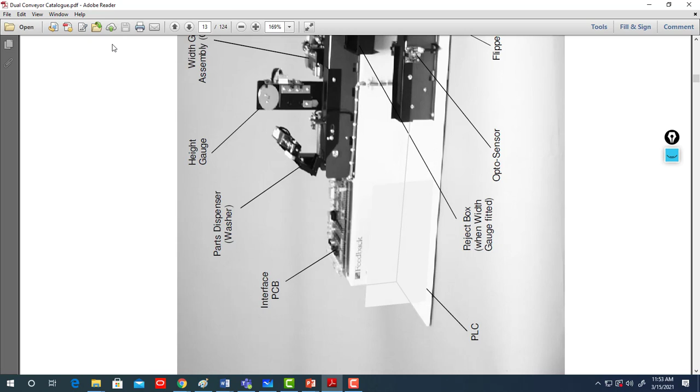I will go with you over the inputs and outputs names. So in here, let's say, I may rotate it.

So here in this photo you see the Workcell system. Here is the Workcell system.

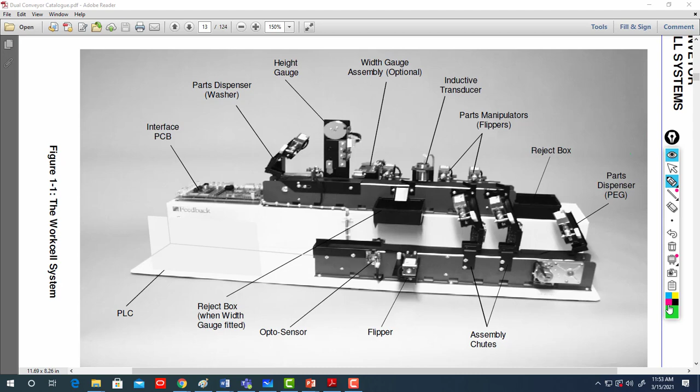In which you can see, starting here, this is the interface PCB.

Here you should have your PLC, like it's sitting here. Then starting from here, it's called the parts dispenser. So the parts dispenser is here, so you have the washer.

Here you have the height gauge. This is a height gauge, so it measures the height of your washer.

Here you're supposed to have a width gauge, and this is optional, so we didn't buy it. So we don't have the width gauge, and we cannot measure the width of your washer. We can only measure the height. So we only have this; we don't have this. This we don't have in our conveyor belt.

You have here an inductive transducer, so it detects metal. And here you have flippers.

Parts manipulators or flippers. So maybe plastic, you program it to go this way, and metals to go this way, or reversely. And here the parts—it's a reject box.

All the parts that are not the good height, too small or too big, then you throw them here.

Here you have a parts dispenser also, like this one. It's to dispense parts. Here it dispenses a washer; here it dispenses the peg.

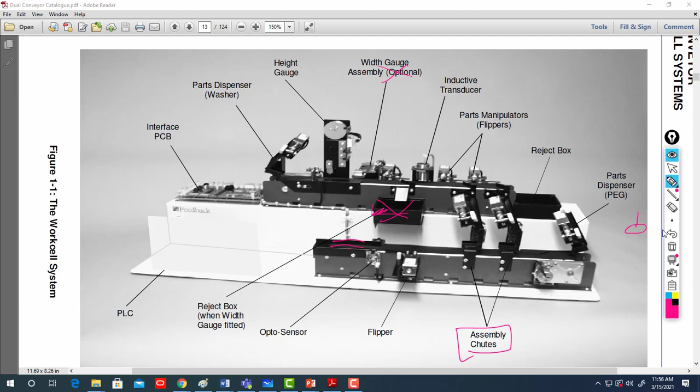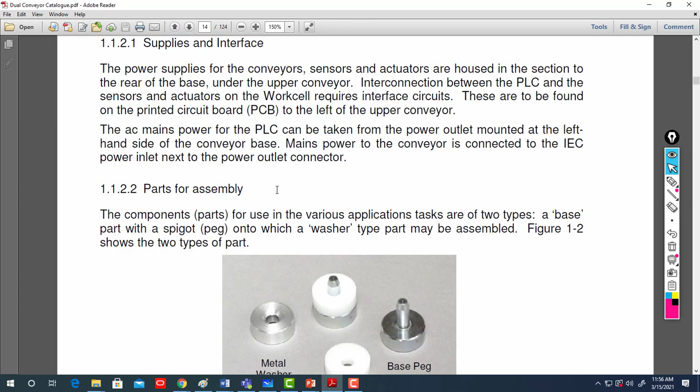So those are the parts for assembly: metal washer, this is the base peg, plastic washer, and how the peg and the washer will fit.

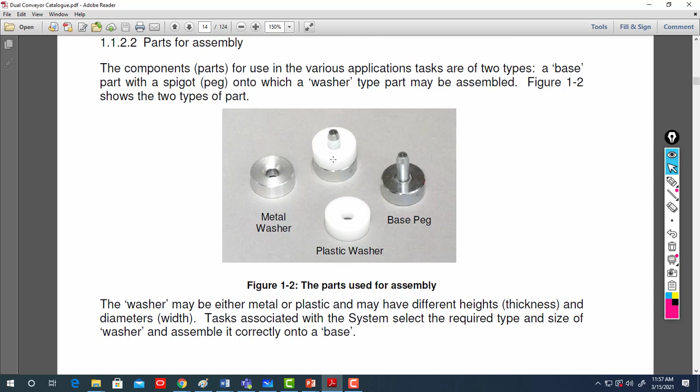So here are the available heights you have. Talking about height or thickness, the standard or correct one is 8.

Wrong height is 7 millimeter and 9 millimeter, so it's 1 millimeter difference. 8 millimeter is a good height; 7 or 9 are a bad height.

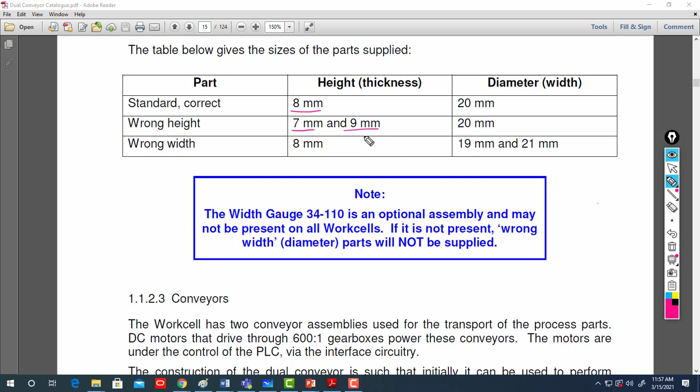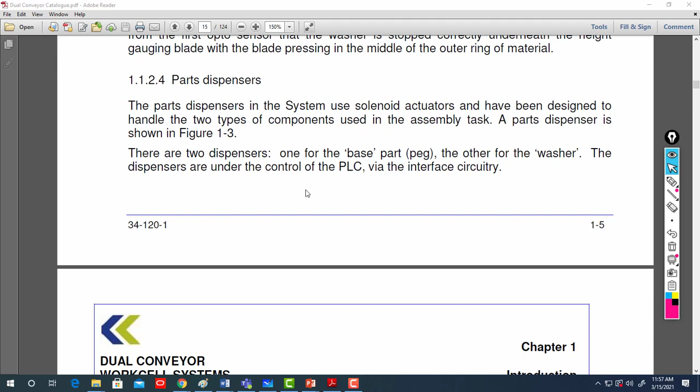The parts dispensers—we have one for the peg and the other one for the washer. And here is how it looks like.

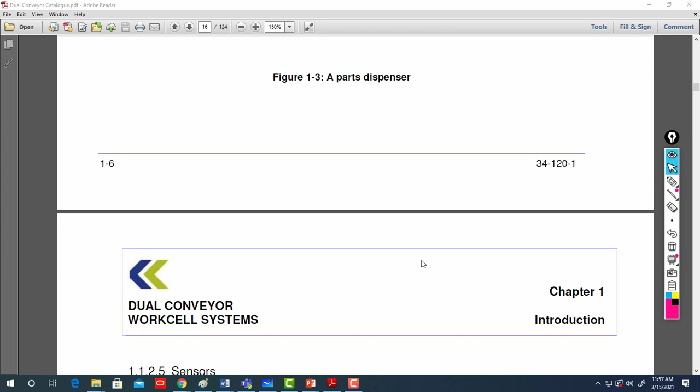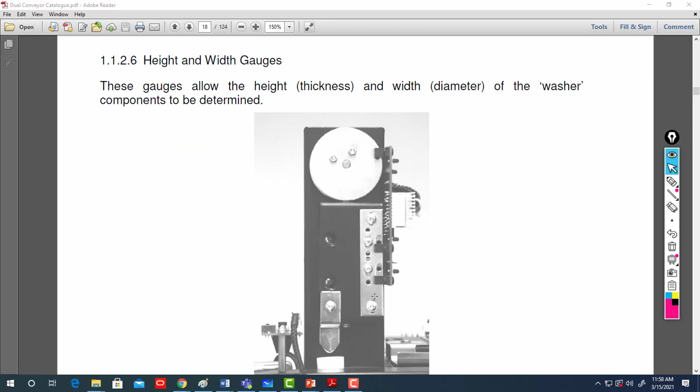So here it's the part dispenser for the washer. So you have here an opto detector sensor, also an inductive sensor, and the height detector.

This is the height detector. Width detector—we don't have it.

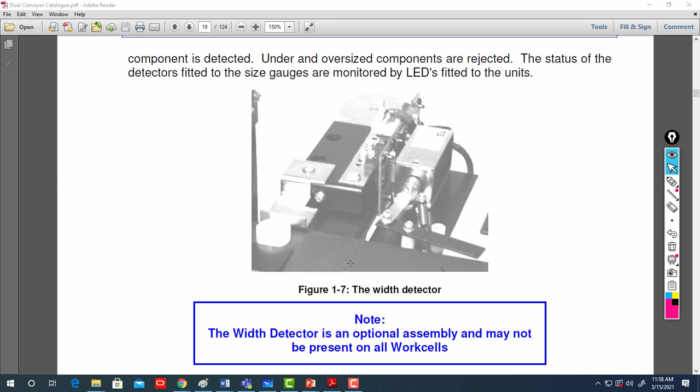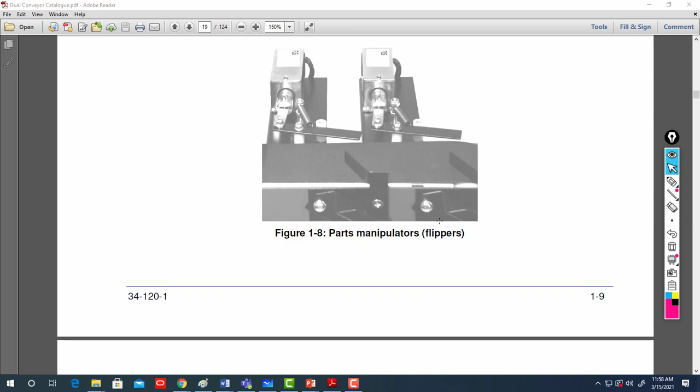Parts manipulator: so you see, maybe you put metal here and plastic here, etc. Those are the parts manipulators, or flippers—we call them flippers.

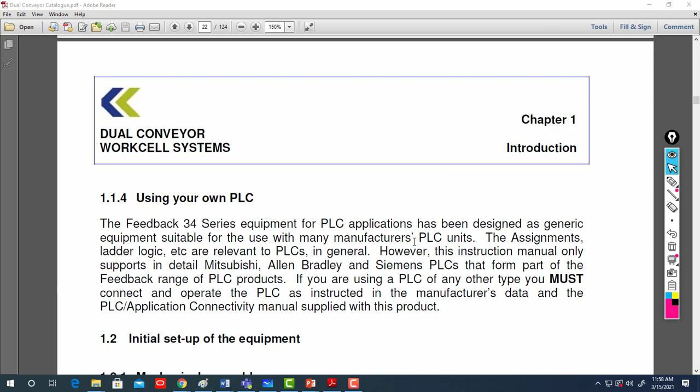So talking about the top conveyor, here is talking to you about your inputs and outputs. So how many inputs and outputs do you have? That was the main question in our case—how many input and output do you have? So let's see.

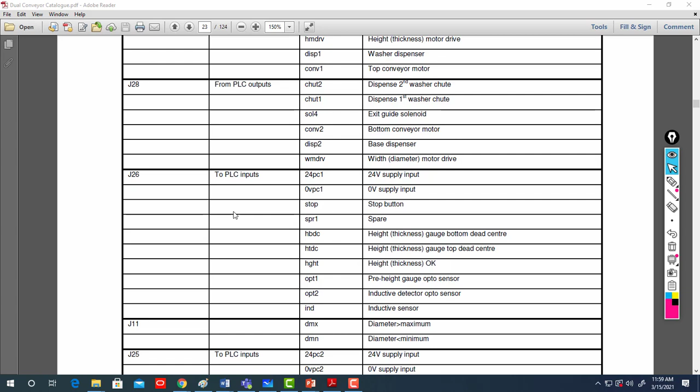Here, if you wish, I will start with the PLC input. So that means talking about output as well.

So if this is the PLC, and here is the input and here the output, so something goes to the PLC input. Actually they go to the PLC input.

What is going to the PLC input? So basically they're actually the sensors, right? So here they said they have a stop button.

Okay, so here you have the pin description, and here is the pin name. Here you have pin name, here the pin description.

So you have a pin, the name is stop, and it contains stop button. Okay, so then this is one input you have.

You have a height, thickness gauge button, dead center. Height, gauge, bottom, dead center.

If you wish, height bottom, dead center. HBDC - height, bottom, dead center.

So this is for the height, for the thickness. You have bottom dead center, and you have

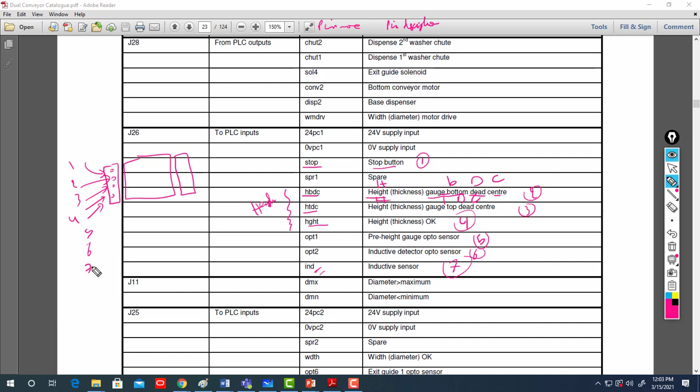So now I'll take them. Okay, 6, 7. So let me delete them and I move. So I have 7 up to the inductive sensor.

If you wish, okay, 1, 2, 3, 4 - all of those are for the height. 5, 6, 7, and you have - we don't have widths. Okay, we have exit guide 1 opto sensor.

This they call it opto 6. Okay, in this catalog they call it opto 6. 1, 2, they call it opto 6. Opto 5. So where is opto 3 and 4?

We'll look at them. Okay, opto 6 is exit guide 1 opto sensor and exit guide 2 opto sensor. The 2 opto sensors are at the end of your second conveyor belt, so to count the number of metallic and plastic parts. So those are them.

But also before them you have 2 other opto sensors, so 10 and 11. So you need to make sure that your number of inputs, the input module, PLC input module, can have all those inputs.

Otherwise you cannot work on it. You cannot connect all your inputs in that case. So opto 3 and opto 4 are the chute opto sensor, first chute and second chute opto sensor.

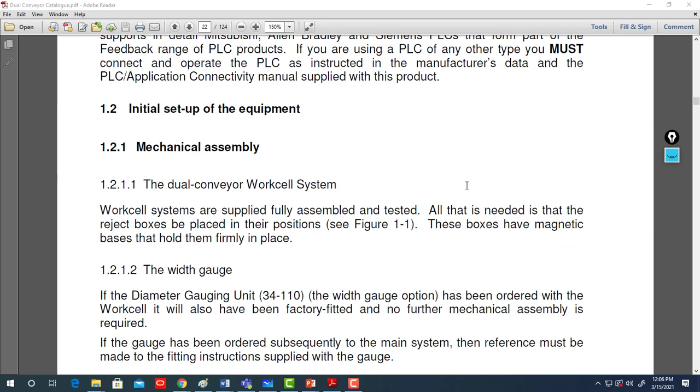Okay, yeah, what's this first and second chute opto sensor? Let's go to the... Okay, so I'm on page 23.

You want to go to page... here, 13.

So where are the chute 1 and the chute 2? First chute opto sensor and second chute opto sensor.

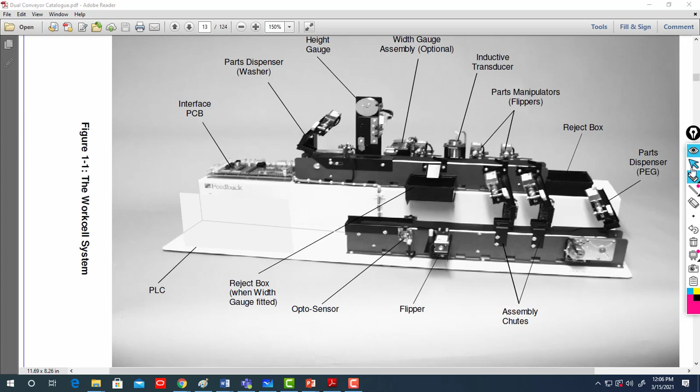So let's now recite our inputs. So you have start and stop push button are here.

If you wish, I will name them as A. So I start by this - stop 1, and so you have 3 on the height gauge.

You have bottom dead center, bottom dead center, top dead center, and OK. Say OK. So you have - these are 4 inputs to the PLC.

Pre-height gauge opto sensor. You have here pre-height gauge opto sensor, and so this is 5. 6, inductive opto sensor. 7 is the inductive sensor.

8, exit guide 1 and 2. So here 8 and 9. Okay, 10, 11, and 12.

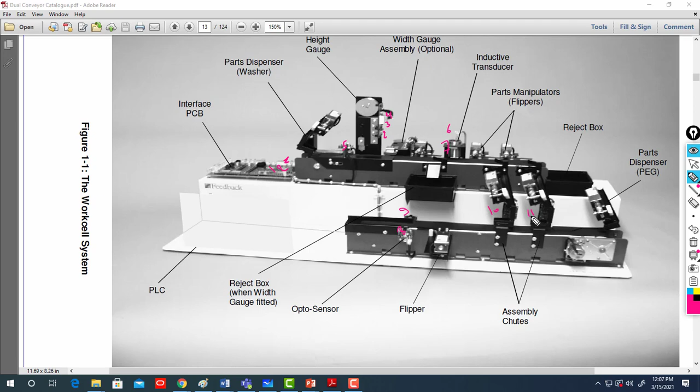So 12 is this. Then 10 and 11 are these two. 10 and 11 - see, this is what we call first and second chute opto sensor.

So this is the assembly chute. When your flippers go this way, then they move this way. Here, this is the opto sensor chute 1 and chute 2, chute 10 and 11.

Okay, so then those are the 12 inputs you have. So you have 12 inputs in your system. Maybe it's hard to know this exactly. So now, when we program it, we'll understand how it works, and whether we use all the pins, or we only use 1, or we use 3, etc.

So what about the outputs? How many outputs do I have?

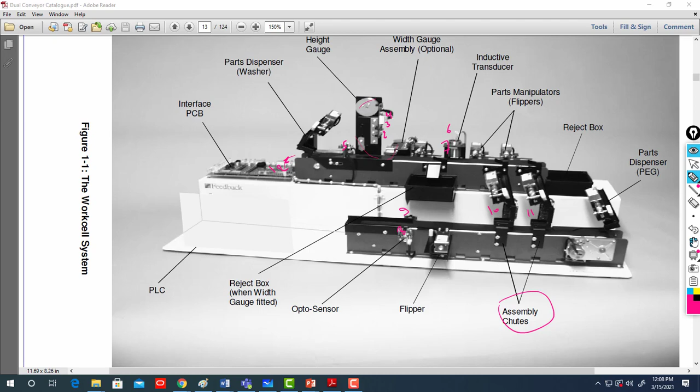So for the output, I will use the PLC output. Let's look at the output field devices - how many do I have? Here they call it solenoid 3, 2 and 1. Let's look at them: solenoid 3, solenoid for the second chute, solenoid for the first chute.

Width diameter rejected part - so this is solenoid. We don't have it. We don't have a solenoid to reject the diameter or the width.

HMDRV - it's a motor, height motor drive, that's what they call it. This is the motor that moves the gauge, the height gauge sensor, moving it up and down. Then this is my output 3.

So I have solenoid, second solenoid - they call it solenoid 2 and 3. HMDRV, I have the dispenser - washer dispenser, which is at the beginning. I have the top conveyor motor, or conv 1. I have chute 1 and chute 2, which is dispenser first washer chute, dispenser second washer chute. You know the chute where your plastic goes and your metal goes, so they call it chute 1 and chute 2. So 6 output, 7 output.

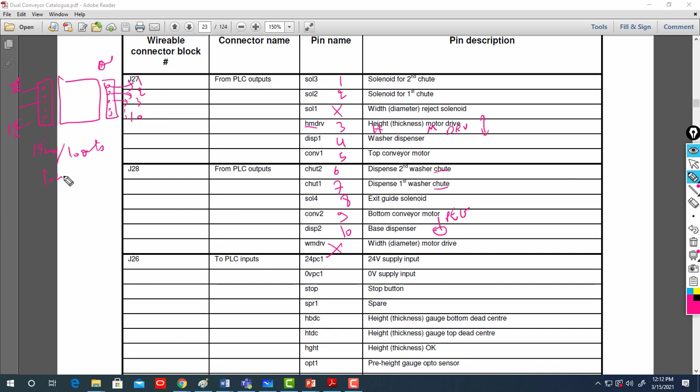So your correct answer will be in this part - the first part of your exercise is 12 inputs and 10 outputs. But of course, for the sensor gauge, maybe you count it as 1, so then instead of 3 you take 1, and therefore you tell me 10 input, 10 output. If you tell me 10 input, 10 output, I'm considering it right. This is for part 1 of your lab series 1, real conveyor belt.

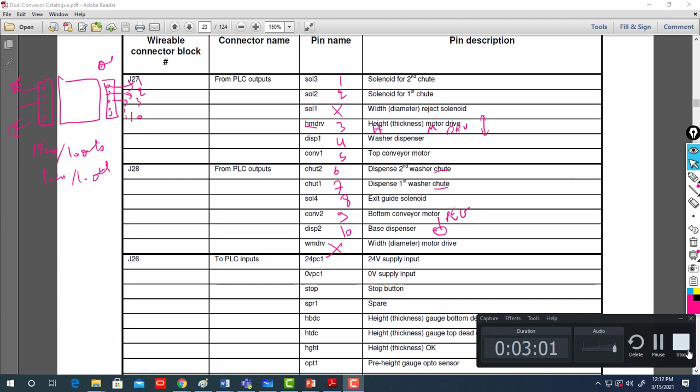So this is a roundup in this figure. Here are all your inputs: you have the start and the stop, you have opt 1, you have height - HTDC and HBDC. For width you don't have, just the top dead center and the bottom dead center.

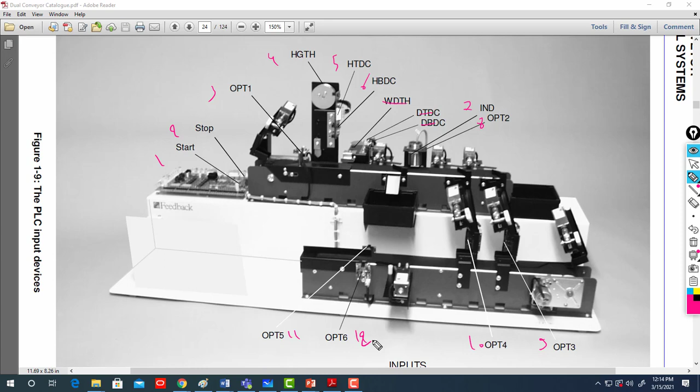For your output, again as you can see, you can count them: 1, 2, 3, 4, 5, 6, 7, 8, 9, 10, 11, and 12. So this is for the output chain. I also recommend naming them this way, so then we don't get confused.